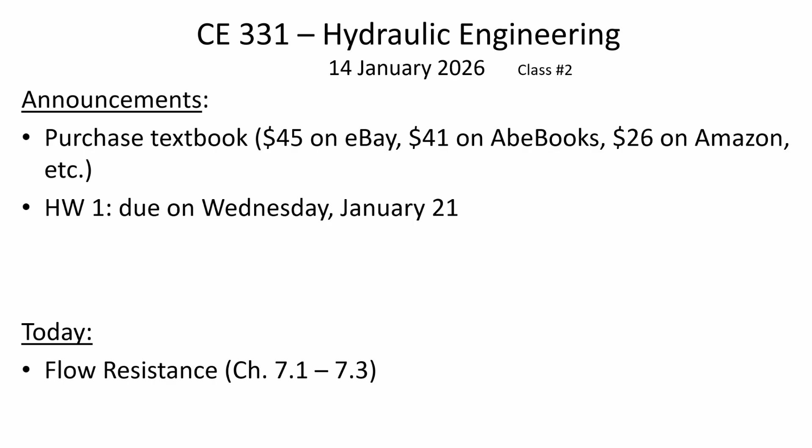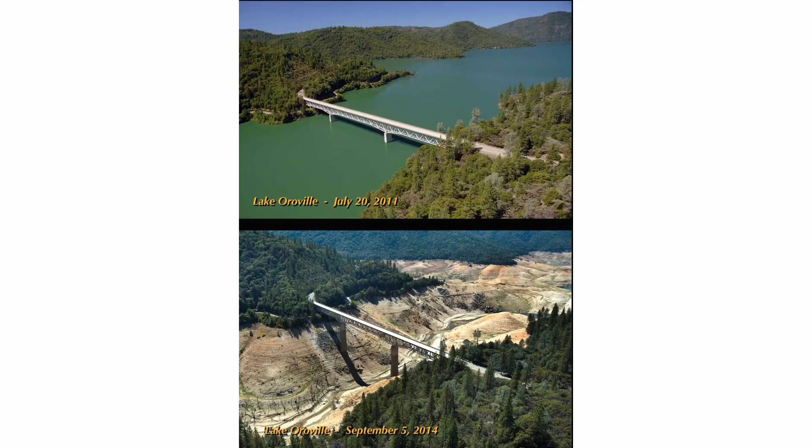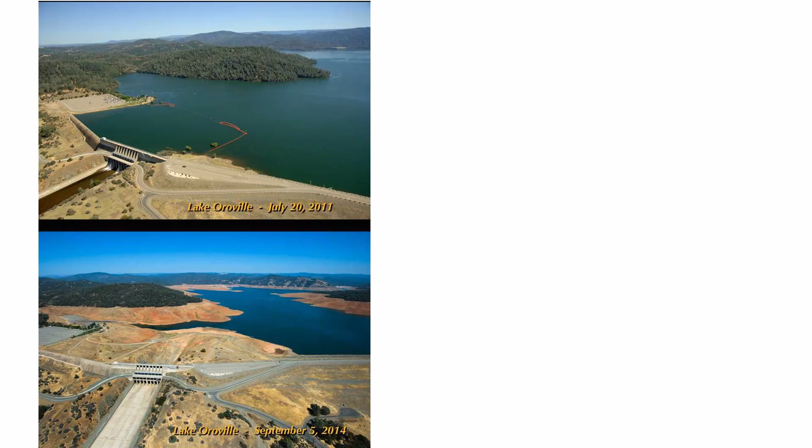Here's another perspective of the water levels having fallen over the course of the same period in Lake Oroville. So the story in California for a lot of years was drought, and it still is in Southern California. But Northern California has a couple of good years when it comes to snowpack and runoff. In fact, back in December of 2022 to January of 2023, the water level went up by 62 feet in this reservoir over the course of just a couple of weeks.

And then more recently, in November of 2024, a similar thing happened. Over the course of 5 days, the water level in the reservoir rose by 20 feet. So when they have rainstorms in the mountains, or when they've got a lot of snow and then it suddenly warms, that can fill the reservoir really quickly.

So I show you these pictures just to make the point that in hydraulic design, we have to be prepared for variability. We don't just design something for the average conditions, whether it's the average flow through a pipe or the average depth in a reservoir. We design the system to be resilient in the extremes, because it's the extremes that can stress the system, whether it's extremes in temperature, extremes in demand, or sometimes extreme age.

A lot of pipes that get put into the ground, for example, wastewater collection, they're left in the ground for 100 years. And so we have to think about, if the municipality just has one chance to get this right, if they're putting the pipe in the ground, and chances are they're going to move on and forget about it for a decade or even a century, how big should the pipe be if we look into the future and think about the likely development in the area that that pipe is serving?

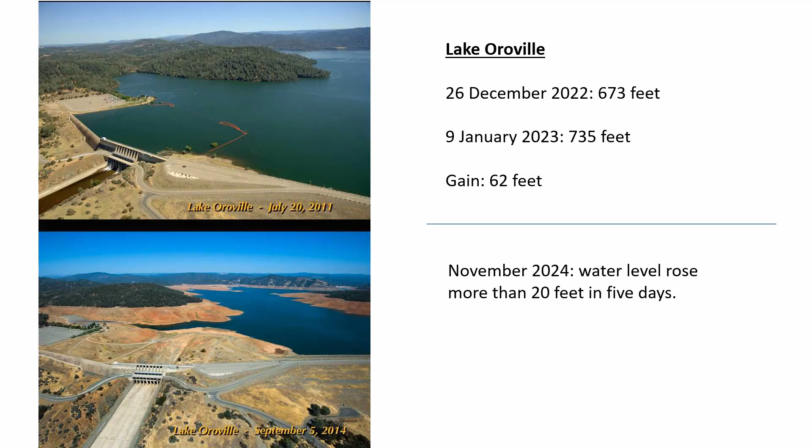So I just want to reinforce this idea of variability over time, that there are extremes that can stress the system, and so the system has to be designed to accommodate it. So that leads into another thing that happened at Oroville Dam back in 2017. By the way, this is the tallest dam in the United States.

It doesn't look like anything special or spectacular, but it's the tallest at 770 feet from the base to the top. And it's a very large man-made lake in California, 3.5 million acre feet. And that unit may not be familiar to you, the idea of what is an acre foot. It's a foot of depth and an acre of area. So that's a way of describing a certain amount of volume. It's the volume of water that would occupy an acre of area and 1 foot of depth.

So this reservoir has 3.5 million acre feet. So that's really a lot of water. That's not millions of gallons, that's millions of acre feet. So it's huge. And it generates electricity in addition to the recreational opportunities and being an ecological, kind of like fish habitat regulator, and being good for irrigation of agriculture. They also use it to generate electricity.

So what happened in February 2017 is there was a lot of rain in the watershed upstream of this reservoir. And the water falls on the mountains and it flows over the surface of the mountains. Some of the water goes down into the soil. Some of the water gets drawn up by the vegetation. But some of it runs off and pools in the reservoir. So it was so wet in February of 2017 that water was entering the reservoir at between 130,000 cubic feet per second and 190,000 cubic feet per second. So that's the water going in.

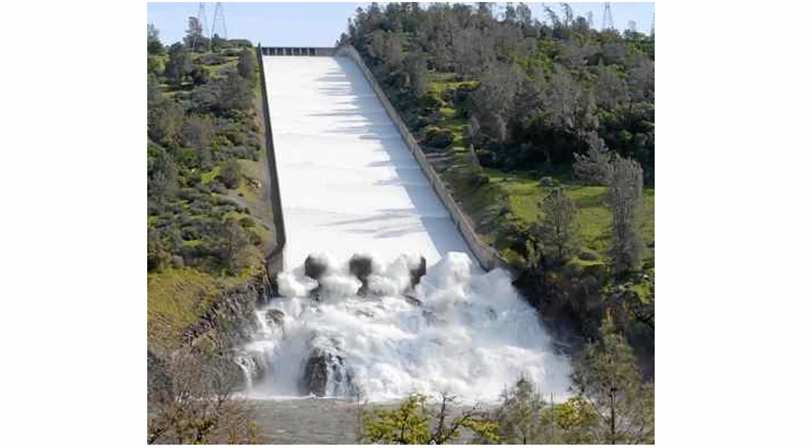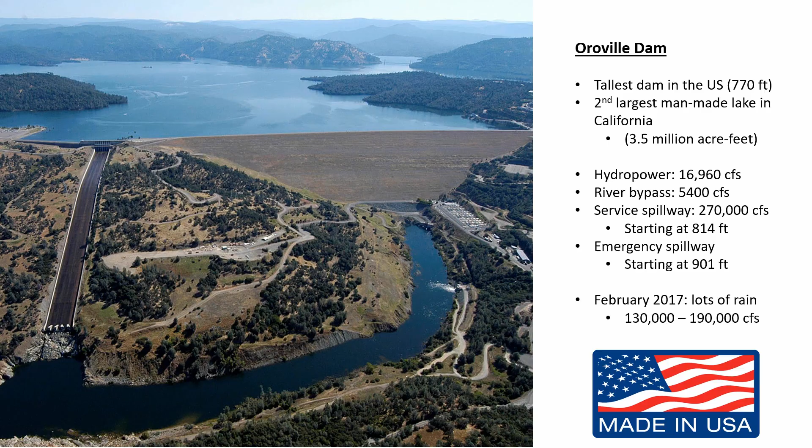But unfortunately, there were some flaws in the design of the dam, and water started going through the service spillway, and it should be fine. The service spillway can take 270,000 CFS, and there was only 190,000 CFS, so it's within the design limits of the service spillway, but there was a problem. With that fast-moving water, a little bit of scour occurred, and the concrete cladding of the spillway got damaged, and once there's a little crack, it turns into a big crack, and the water's moving so fast that cavitation can occur.

These tiny little gas bubbles, it's actually water vapor. Liquid water moving at a high velocity can sometimes vaporize and turn into vapor bubbles that then will collapse and send shock waves through the water. It can cause pitting and damage to propellers on boats and to spillways. And so there was a lot of water flowing over the spillway because the reservoir was getting so much rainfall, but then there was some damage that got progressively larger.

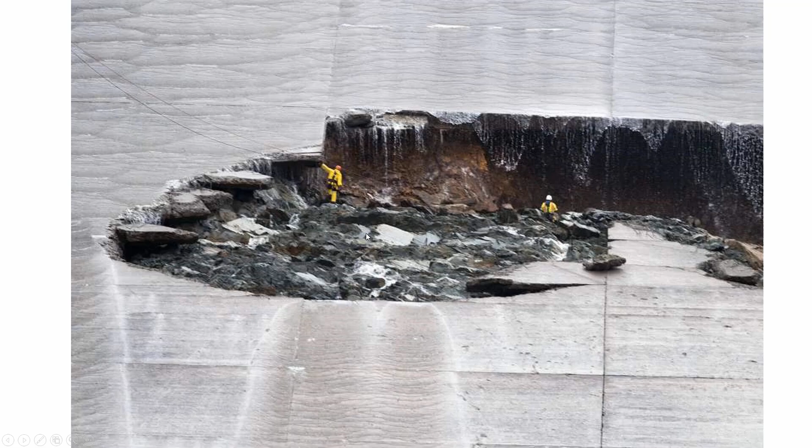And now think about it. They needed the water to go down this spillway because too much is coming into the reservoir, but they had to turn off the spillway because of the damage. So now the water level is getting deeper and deeper in the dam, and some guys went down there to check things out. That gives you an idea of how big it really is. It doesn't look that big from this perspective. It just seems like, oh, what's this, maybe 20 feet wide or something? No, it's very, very big.

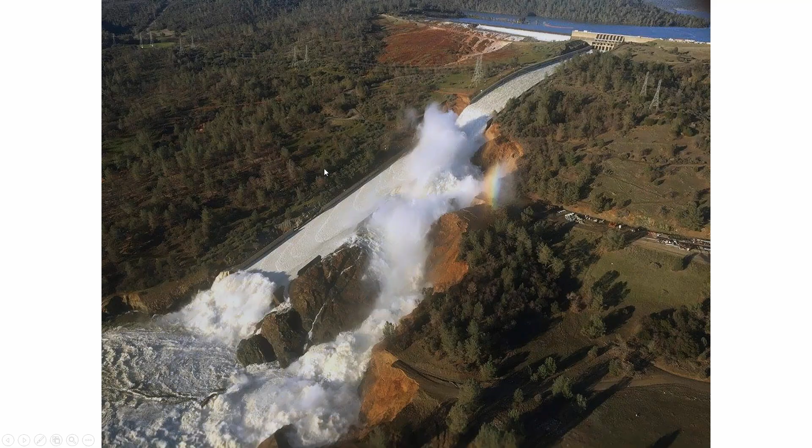People felt pretty confident that there's enough rock here that it's not going to get all the way to the dam. But at the same time, they were also feeling a little bit nervous because you don't want any of this rock to be scoured. It looks pretty solid, but it could be fractured rock, and if this is fractured rock in the hillside, then it can carry it away downstream, and is it maybe going to threaten the dam?

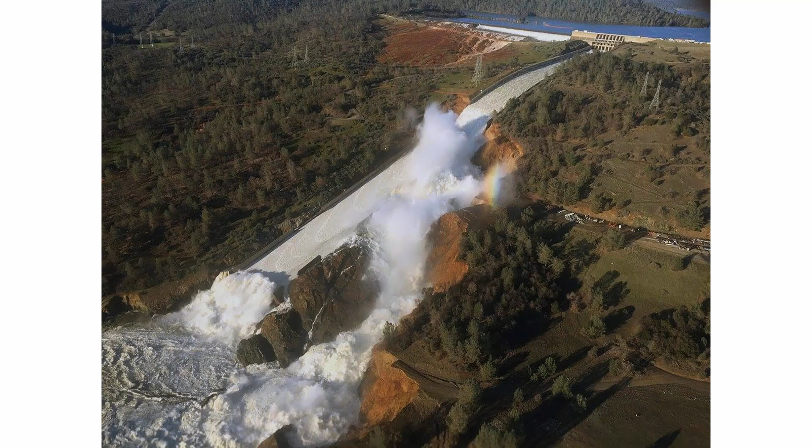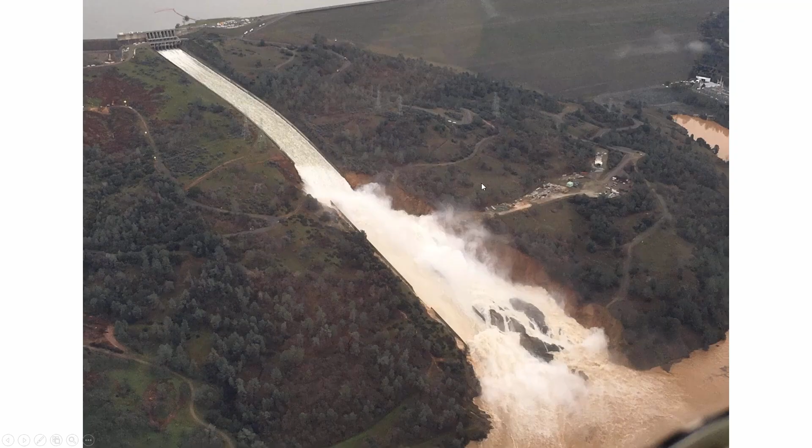So they started to evacuate people downstream, telling them, well, probably the dam's going to be okay, but just out of an abundance of caution, maybe you should move out of the path if the dam does break. And this gives you an idea of, the scour of the rock to the right of the spillway was headed in the direction of the dam. Still, it's got a ways to go. And spoiler alert, it never destroyed the dam. But they did end up having to send water over the emergency spillway, which they really don't like to do.

By the way, this brown color is just kind of indicating that material underneath the concrete is being washed downstream as the water's flowing over the spillway. So it should be all white and clear, but it's carrying rock and soil downstream as it continues to dig a deeper hole underneath where that service spillway used to be.

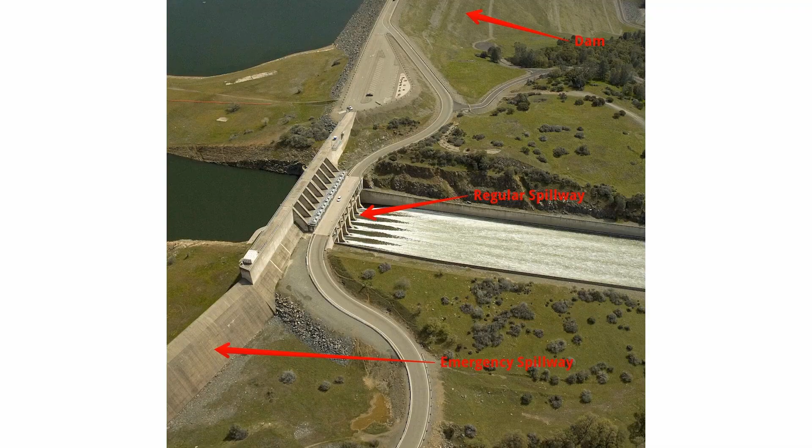So they started to realize that water was going to flow over the emergency spillway, which it had never done before. They only very rarely use the regular spillway. Remember, in Northern California, this water is precious. They don't want any of this to go to waste, so they keep as much in the dam as they can, and they just release it very slowly, enough to keep the fish alive, enough for the farmers to irrigate their crops, and so they're very rarely going to send water through the regular spillway. They can't harness any electrical power for what they send through the regular spillway, and they've never, like I said before, used the emergency spillway.

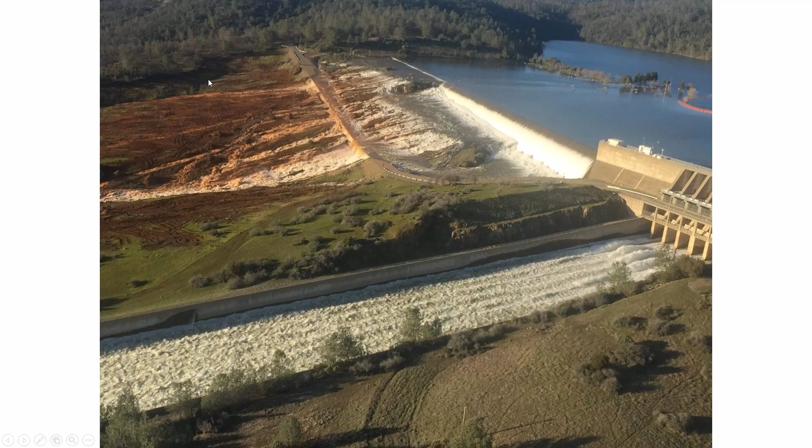So when the water levels were rising high enough, eventually the water did go over the emergency spillway. And you can see it's just this big brown streak where a lot of the vegetation that had been in place got washed downstream. I think this picture was taken actually after; the flow rate was even higher before this photo. So it's hard to see why the hillside would be quite as decimated as it is. It's because the water flow was even greater than when this picture was taken.

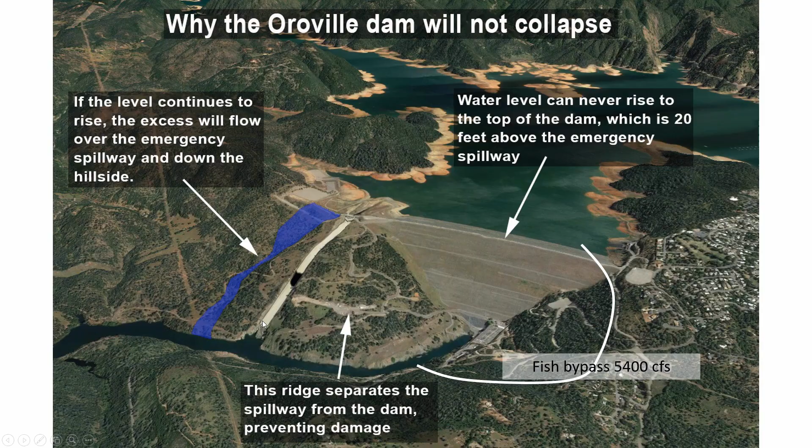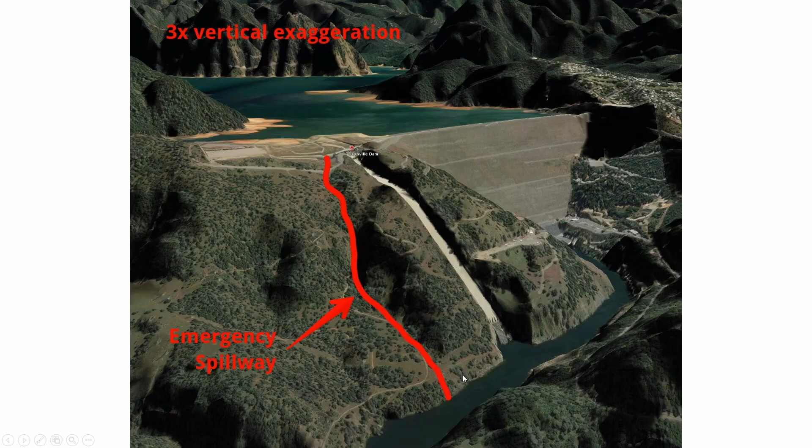So they had water going through the electrical system to generate power. They had water going through the service spillway, although they were trying to keep the flow rates relatively low to limit the damage to that big hole. And then, in spite of those two also carrying flow, it started going through the emergency spillway. So there were a lot of people assuring us that the dam would not collapse, that the emergency spillway would be on the opposite side of the service spillway. Here's the hole. And it did. The dam did not collapse. The water that flowed through the emergency spillway relieved the incoming flow, and then it stopped raining, and so the water level stopped rising eventually.

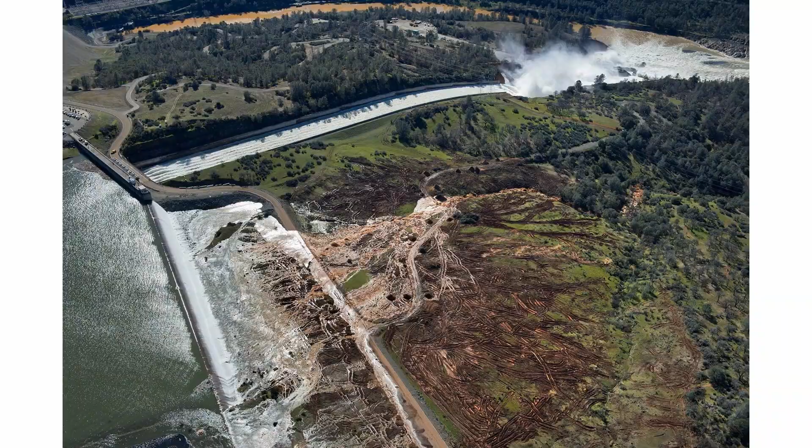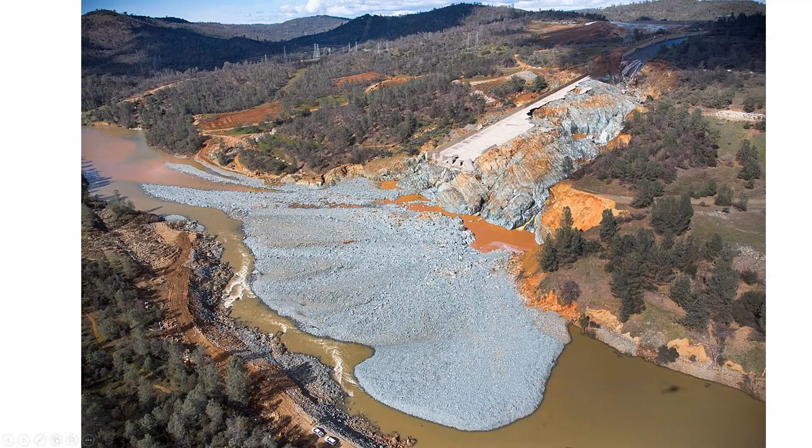After doing quite a lot of damage, more than $1 billion worth of damage. But these things are expensive. This gives you an idea that it was pretty torn up by the end of it. There wasn't much left of the original service spillway. And look at all of this material which had been excavated by that water. A lot of power in the water got moved downstream. So the repair cost was estimated at more than $1 billion, and I ought to check in. I assume that project is complete, that they've built back better, and that hopefully next time they need to use it, it's not going to cause this catastrophic incident.

But in a post-mortem analysis, the Association of State Dam Safety Officials said that this was not just a short-term failure, but it was a long-term failure to recognize and address the spillway design and construction weaknesses, that there was a poor quality of the foundation, and the service spillway was deteriorated.

So some inspections in years prior to this incident had acknowledged the problems. It's not like it was a surprise. It was just that policymakers weren't acting on the concerns raised by the inspectors. And then, the inspectors, it's not necessarily in their interests to raise too much of a stink. They don't want to get fired for being a problem.

So it's a tricky situation that raises a lot of questions related to engineering ethics and the duty to preserve the health, safety, and welfare of the public when you know that a dam isn't being maintained the way it ought to be. And I guess it's just lucky that there wasn't even more damage and loss of life than there was.

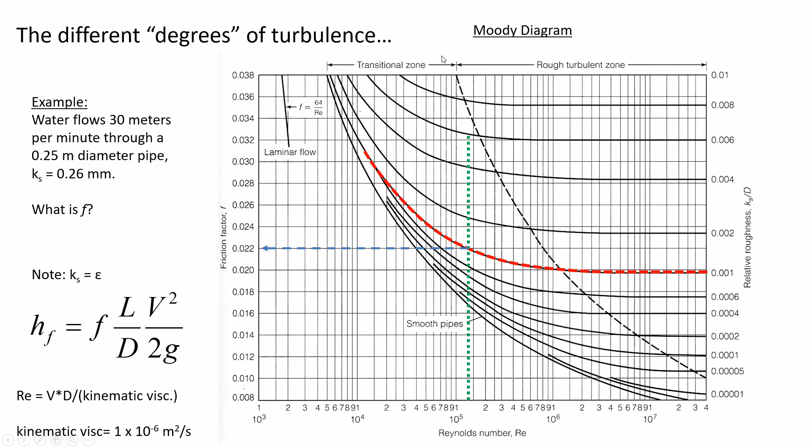Okay, so this is one of the problems on your homework assignment. And in this, you're going to have to determine the friction factor using the Moody diagram. That's just what we've been talking about. And then you're going to use the friction factor in this Darcy-Weisbach equation. So you're going to try and find out how high does the tank have to be?

And so you're solving for Z1, because location 1 will be at the water surface in the tank, and the pressure of the water at the surface of the tank is 0. So P1 will cancel out. Z1 will be the unknown. V1 is talking about the velocity of the water in the tank, and that's going to be 0. And there's no pump here, so the pump term will cancel out. So the only thing that's going to be on the left-hand side of the energy equation will be Z1.

And then on the right-hand side of the equation, you've got the elevation in this building defined as 100 feet, so that would be Z2. And we're told that we want to have a pressure of 30 psi. So that'll be P2, 30 psi. So you'll have to convert that to pounds per square foot. It's in pounds per square inch right now. You'll need to express it in terms of pounds per square foot.

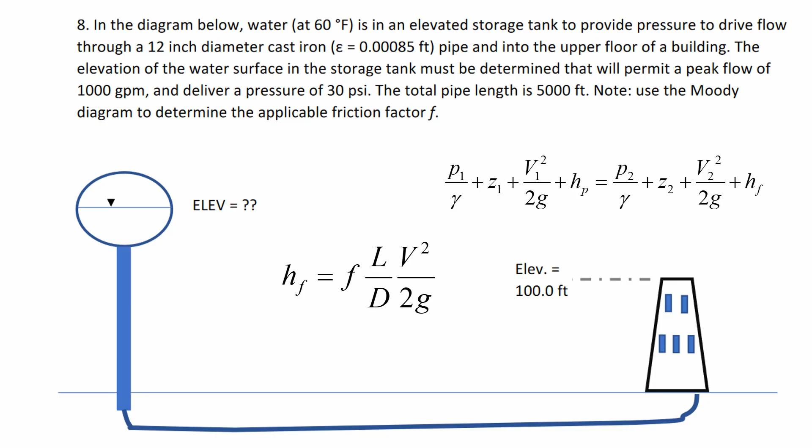Okay, let's talk about resistance to flow. Think about water is flowing through a pipe, and it's experiencing a frictional resistance because the pipe is stationary, and the pipe has this roughness, and water has viscosity, meaning that water can't frictionlessly slip over some stationary surface. There's going to be a frictional resistance. So your book provides this diagram.

We're going to talk about this diagram for maybe 10 minutes. I needed to look at this diagram for a half hour to understand. Maybe some of you could understand it faster than that. Maybe some people take more time. But I raised the point just to reiterate how important it is for you to get the book, because I'm going to tell you what I understand is going on in this illustration. But really, if you want to understand and thrive in hydraulic engineering, you need to sit and look at that at home, review these variables and the definitions, and really do the force balance in your mind to understand it. So it's not enough just to sit in class and listen to me talk and then do the homework. What is enough is to engage on your own, to really think about the material. Have the book, read it, and sit there and think about it.

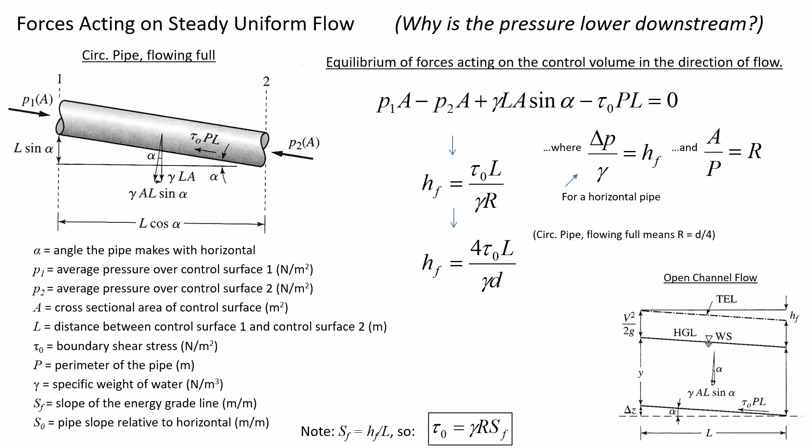All right? Okay, so let's work an example related to shear stress. And because we're pressed for time, I think what I might do is just show you these calculations directly, because we still have some other ground. I got carried away showing you those pictures of Oroville Dam.

So let me explain the setup here. The pipe is inclined uphill, but you'll notice here that the energy grade line is downhill. And that's something that you should know: it doesn't matter if the pipe is horizontal or inclined down or inclined up, the slope of the energy grade line is independent of the physical slope of the pipe for closed conduit flow. The energy grade line is just a graph of the energy in the water.

And so if the pipe is going uphill and you're losing pressure in the water because of that, you're also gaining elevation. So it's all kind of exchanged, and the reduction in the energy grade line is because of pipe friction, H sub F. Okay, so what we're told is the diameter of the pipe here, that it's inclined, so that's S naught, the slope of the pipe itself. And let's say, just for instance, that we somehow know the shear stress of the water is 45 newtons per meter squared.

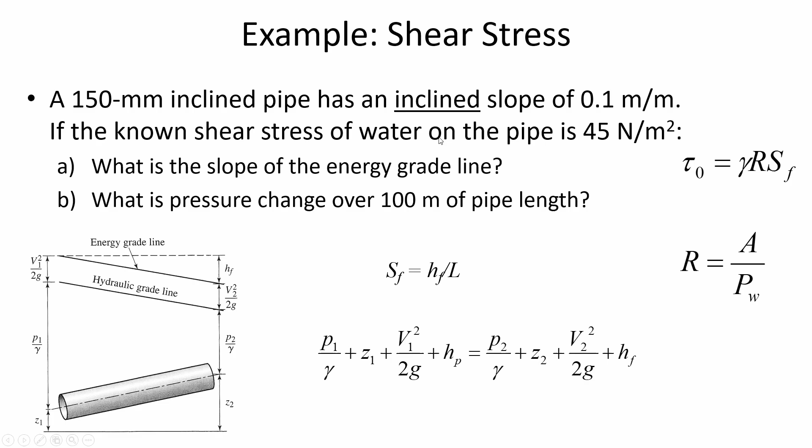In a case like that, what would be the slope of the energy grade line, and what would be the pressure change over 100 meters of pipe length? So let me show you the calculations for this, and then let's see if there's any questions. I think I've got this scanned already.

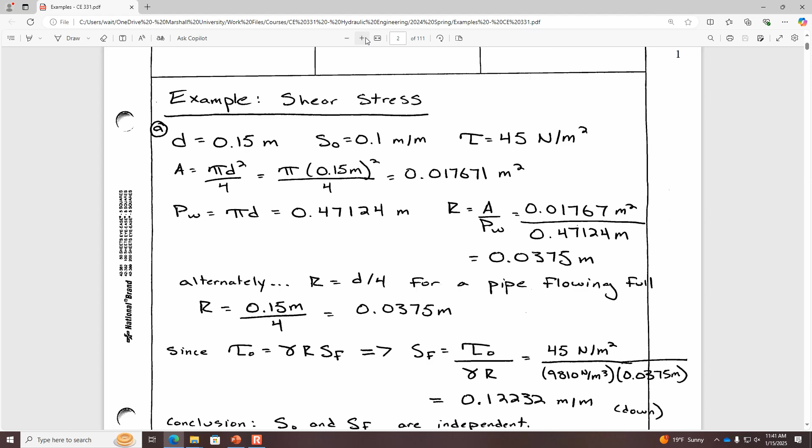Okay. I don't have the best handwriting. I'm working on it. Hopefully this will show us what we need to do in order to determine, remember, what we're trying to find out is the slope of the energy grade line, S sub F. So what we would do in a case like this is use the diameter to find the cross-sectional area, use the diameter to find the wetted perimeter, and from that we can determine the hydraulic radius.

And the reason why that's important is, remember, we had this equation that was saying the relationship between the slope of the energy grade line, here at the bottom, shear stress, hydraulic radius, and unit weight of the water. So those are kind of the four variables that we're putting together here to find out the slope of the energy grade line. The unit weight of water, just using kind of the standard 9810 newtons per meter cubed.

A hydraulic radius, I could either use the shortcut and just say it's the diameter divided by 4, and from that get 0.0375. Or I could go to the trouble of calculating the area, calculating the wetted perimeter, get the same value, 0.0375 meters. So either way you do it, you get the hydraulic radius, we were given the shear stress, and we know the unit weight of the water under typical conditions is 9810 newtons per meter cubed, and so that tells us how steep the slope of the energy grade line is.

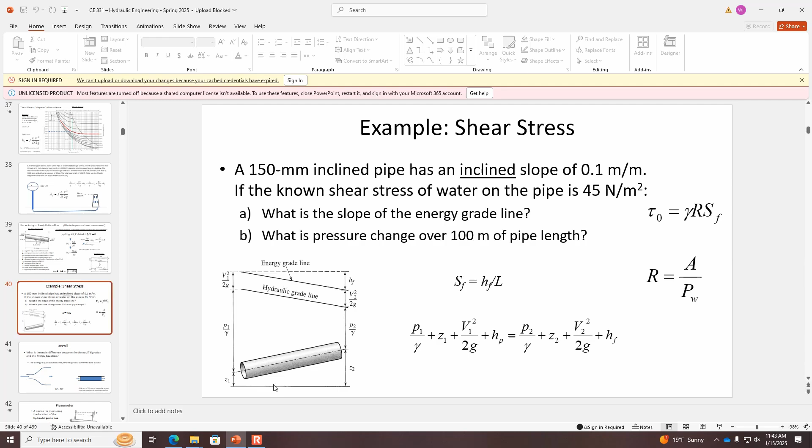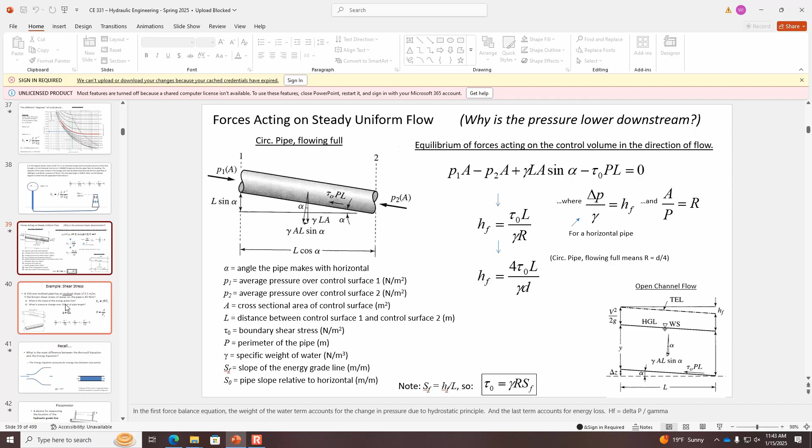The next part of the example is, given that, what would be the pressure change over 100 meters of pipe length? So what we're going to do with that is remind ourselves that the slope of the energy grade line, here in this component of the formula, is the magnitude of friction loss divided by pipe length. So we're now going to be using this formula to answer part 2 of the example. What's the pressure change? We want to know how much head loss actually accumulates in 100 meters of length.

So if you've got 100 meters of length, then your total head loss is going to be 12.232 meters of energy loss due to pipe friction. So if you're losing 12 meters of energy due to pipe friction, and we put it into the energy equation to account for the elevation difference, because in 100 meters of length, the pipe is elevated 10 meters.

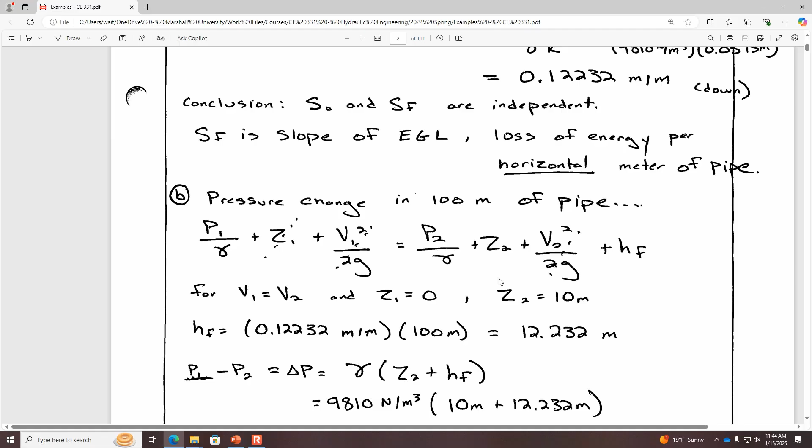So if we just say z1 is 0, z2 is 10 meters, we want to know what's the pressure downstream. The pressure is changing for 2 reasons. It's changing because of the energy loss due to pipe friction, and it's also changing because of the elevation difference. And both of those are going to be reducing the pressure. If the pipe downstream is higher, that means the pressure is going to be less because of the elevation change and because of the energy loss.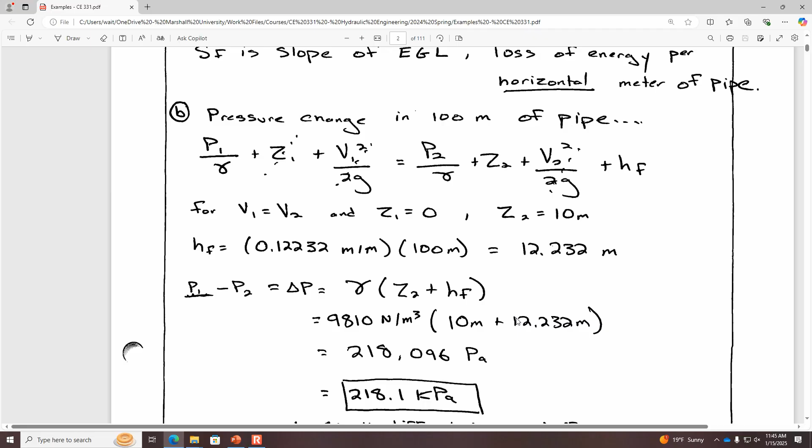So the magnitude of the pressure change would be 218 kilopascals over 100 meters of pipe. And that's a lot of pressure change. Just to put it in perspective, typical water pressure in your house is about 500 kPa. So in a case like this, whatever flow is going through that pipe, the pipe might be too small. If you don't want to waste pressure on head losses, you maybe need to make the pipe a little bit bigger to have less energy loss due to pipe friction in a scenario like this.

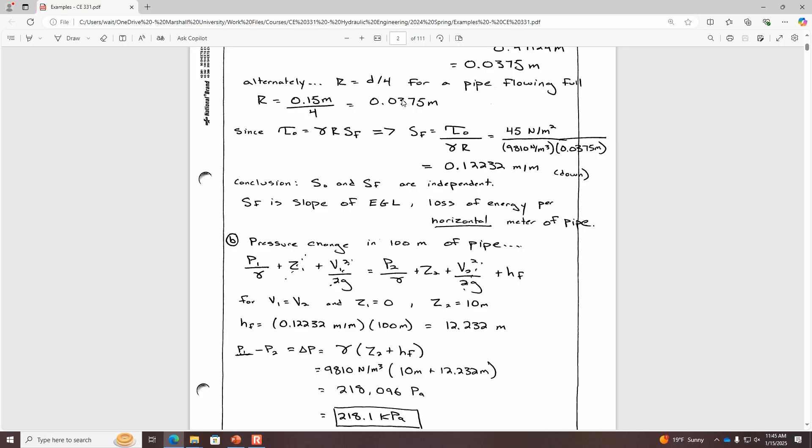So I apologize we had to rush through that calculation. If you're struggling to copy it all down, I'll remind you that the video is going to include this portion of the PDF file. If you need to go back through the YouTube video, then you can copy the rest of the example, and hopefully have more time to think it through after class as well.

Any questions about this example just relating shear stress and head loss due to pipe friction and pressure changes? So this is a good lead-in to that problem number 8 on the homework that I showed you the figure for at the beginning of class, because we're substituting in known elevations, we're dealing with the velocities, finding the pressure difference effect.

Yes? Since the slope is changing, the velocity should be changed? Good question. The pipe confines the velocity. Because water is incompressible, the velocity is the same between location 1 and location 2. So let's say if here's location 1, here's location 2, the water velocity is the same because the diameter is the same. If the diameter of the pipe isn't getting any bigger or narrower, the velocity has to stay constant.

Because water's incompressible, the volume that it occupies isn't going to change based on the pressure of the fluid. A gas would maybe be different, but the velocity at 1 and 2 is equal. Great question. Are there other questions? Okay.

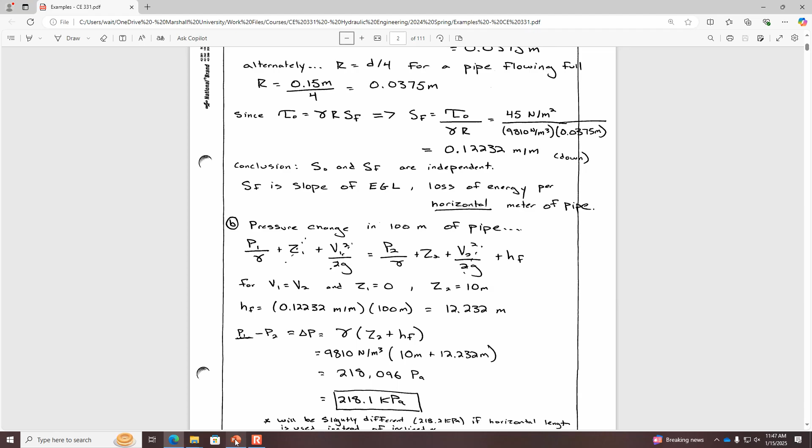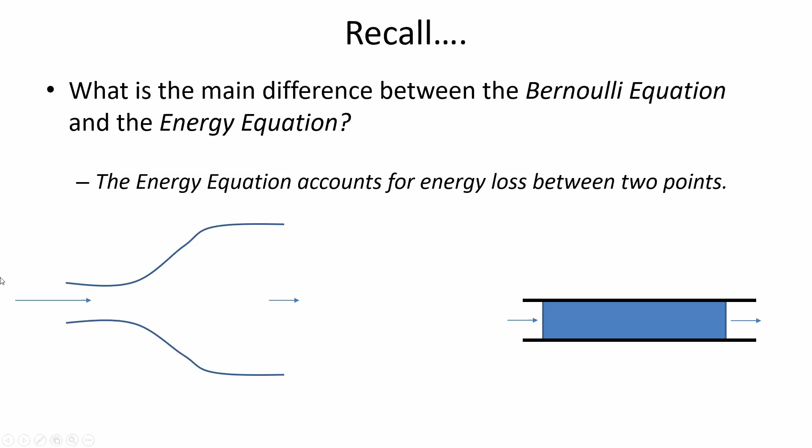So remember that there's a difference between the energy equation and the Bernoulli equation. They look similar. The Bernoulli equation is good for something where the diameter is changing and to predict the pressure change due to a change in diameter. So the Bernoulli equation would be good for a valve or a bell like this, but the energy equation would allow you to, for a pipe where the diameter is constant, know how the pressure is changing due to pipe friction. So the Bernoulli equation ignores energy loss due to pipe friction, but the energy equation accounts for it.

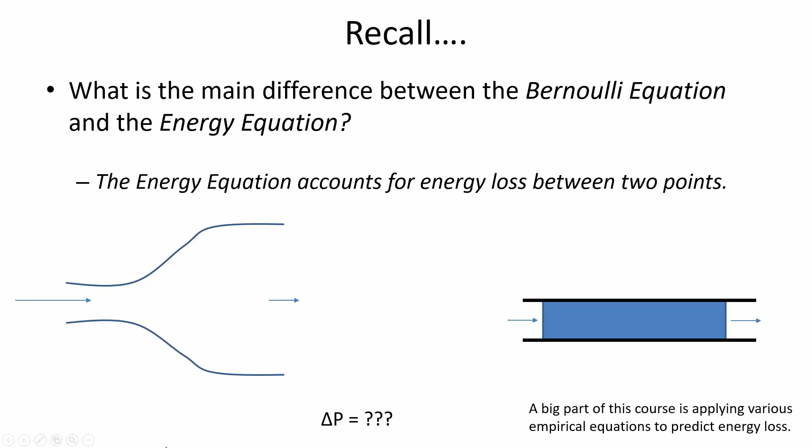So the change in pressure through a pipe is because of energy loss due to pipe friction. And so figuring out how big the pressure change is going to be is what we use the Hazen-Williams equation for and the Darcy-Weisbach. Okay, in the time that's remaining, I want to just talk about a piezometer. This is probably the simplest way to measure the pressure in a pipe.

If you've got a big pipeline and you just punched a hole in it, water starts spraying out all over the place. But then if you connected a tube to that hole that you punctured, and then you just run the tube up, eventually the water level is going to rise to a certain height, and then it's going to stop. So a piezometer is just a location where the water is rising to a height that corresponds to the pressure in the pipe.

And so how high will it rise? Well, you just use the hydrostatic equation to describe the delta H. So it's related to the unit weight of the fluid. So if you have a piezometer at 2 locations in a pipe, then the difference in height that the water rises to is because of energy loss due to pipe friction.

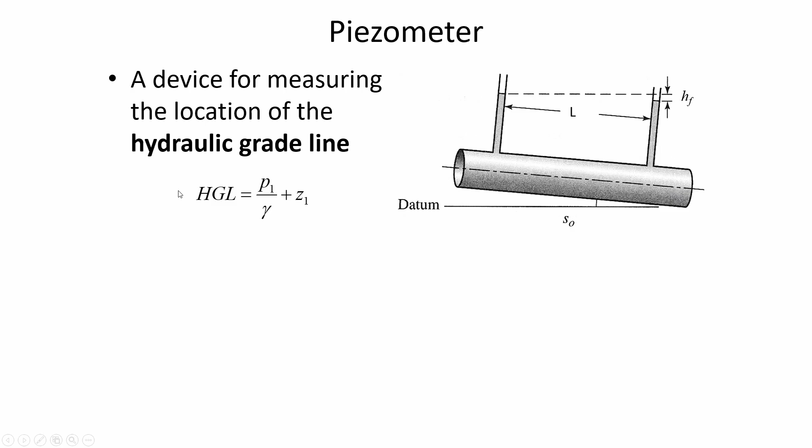So a hydraulic grade line is described by the physical location of the water in the piezometer. So you could visualize the hydraulic grade line with a series of piezometers connected to a pipe. And it's from this observed energy loss due to pipe friction that we can use the Darcy-Weisbach equation to estimate what the friction loss would be.

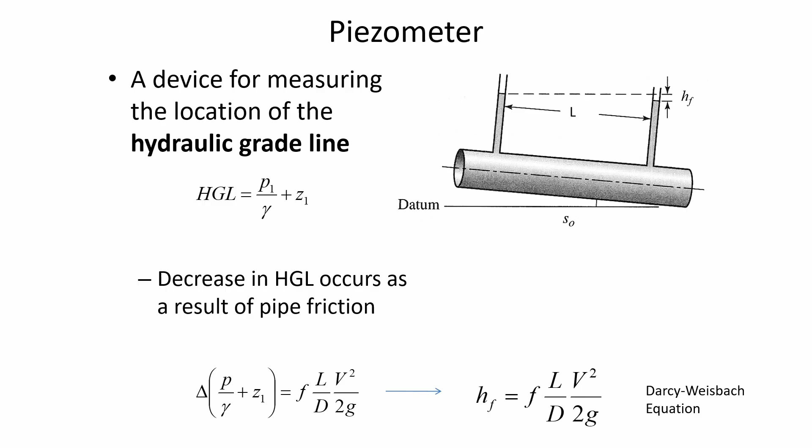Because we can physically install a piezometer, but we want to be able to predict in the absence of direct measurement how much pressure change there's going to be. So we use this Darcy-Weisbach equation to predict in the future how the pipe is going to behave in situations where we don't necessarily want to install a piezometer at every location in the system.